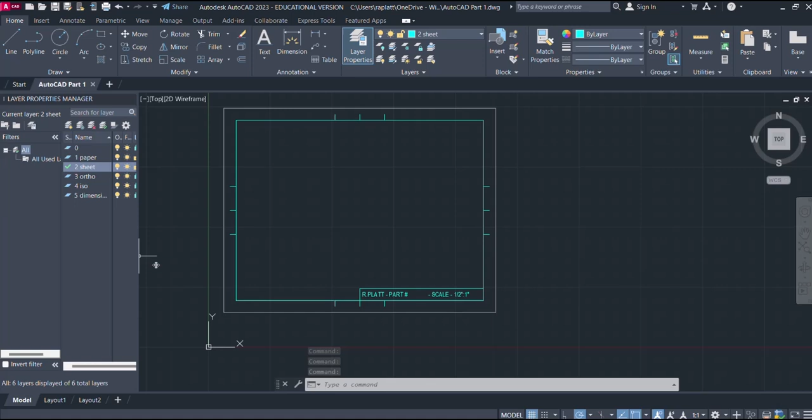There we go. Alright, now I'm going to go to my layer manager, layer properties actually, try to expand that out a little bit. Now because of my master, all my colors are preset, so that's good. So I'm going to click on orthos, lock everything. I need to make sure the ortho layer is unlocked.

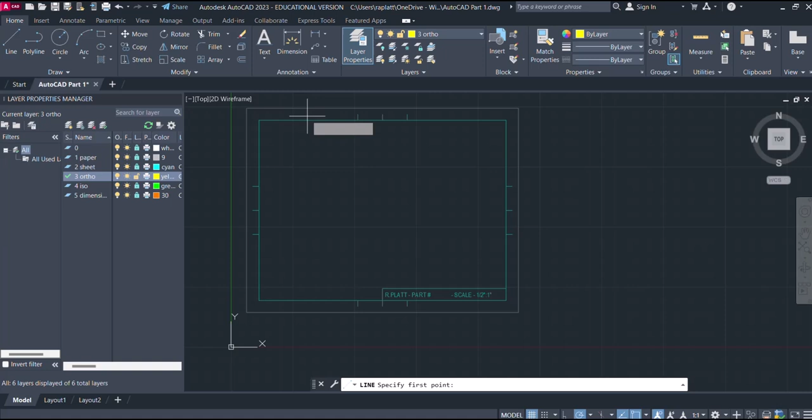That's good. So I get my line command. Now I'll come over here and snap to the registration marks I created. Hit escape. Back to line command. Now later you can hit your space bar between drawing segments and it repeats the last command you chose.

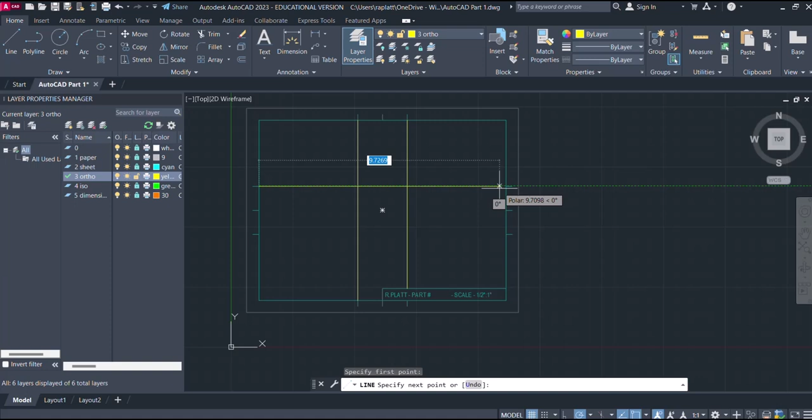Come across here, escape, line command again, put that right there, escape.

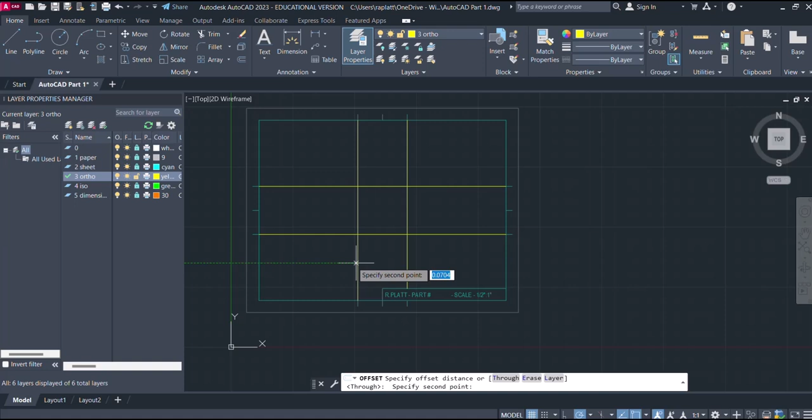Probably what we need to do now is go ahead and hit our offset. And I'm going to key in, wait a minute, hold on, I gotta snap to it first. Hit escape. There it is, 0.25. So select my object, grab that one, move it over, that's good.

Now come back and hit that offset command again. We're going to key in 0.75, so on the top view here we can grab that and pull it at 0.75. Now in the front view, excuse me, right view, we got to do that as well.

Okay, let's select it again, and I'm going to key in 1.25 for the height of the part. Grab that line, come down below it, looks pretty good.

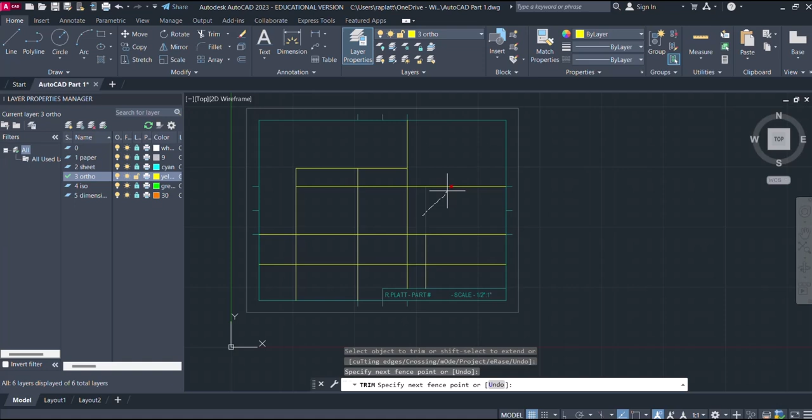Now let's trim out some of these lines so I can define what the top view is. I'm going to take that one out because I don't need it. Take these out right here. Okay, get rid of that one. Get rid of these. Okay.

Go back to my line command because I need to make sure I got that corner so later I can draw my ISO. So I'm creating my anchors here is what I'm trying to do. Hit escape. Let's go back to, no, not that.

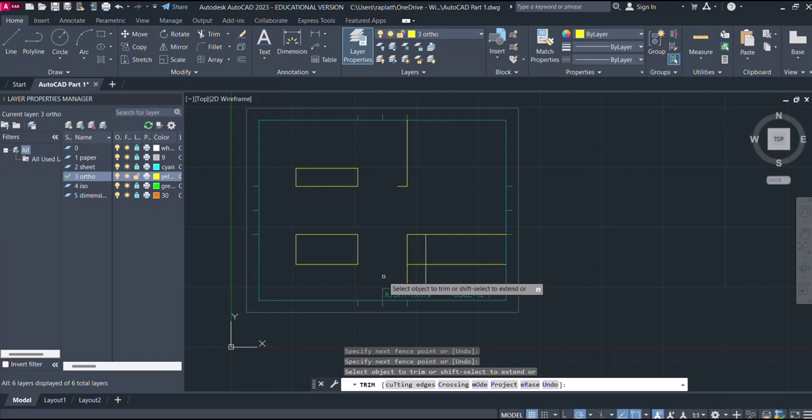There we go. Trim command again. Trim these out. See, now I can come across here and get rid of that. Still have a place where I can snap to create my ISO. Okay.

Alright, so let me think about this for a minute. I don't think that's what I want to do. Give me a second. Okay, let's go back to line.

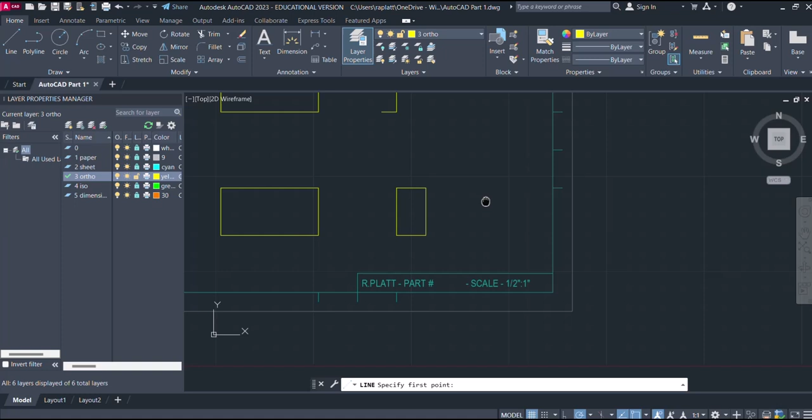And I need to start working on that front view, which is in the lower left. Hold on a second here, let me think. I've got that slanted area on that thing, so I'm going to probably hang on a second here. There we go. Get my trim command and take that out.

Go get my line command again. I'm going to come off of this 0.5. It's good. Okay, now it continues until I hit escape. So let me go ahead and hit escape. There we go. Go back to line command.

Select on this. Come up. Make sure I'm 90 degrees perpendicular. 0.25. It's good. Now I just snap to that. I got the front view done. Okay, it's good. Let's concentrate now on that top view by making an extension.

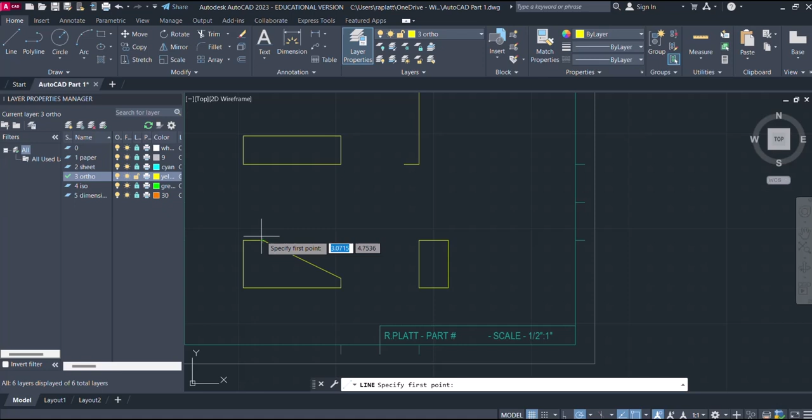I snap to that one point, then move my hand up. There we go. Got that feature in the top there. I'm going to come over here and do the same thing. Just go across, then I'll click. Come across there, and I got that feature drawn in. Alright, looks pretty good. Looks like we got our views in.

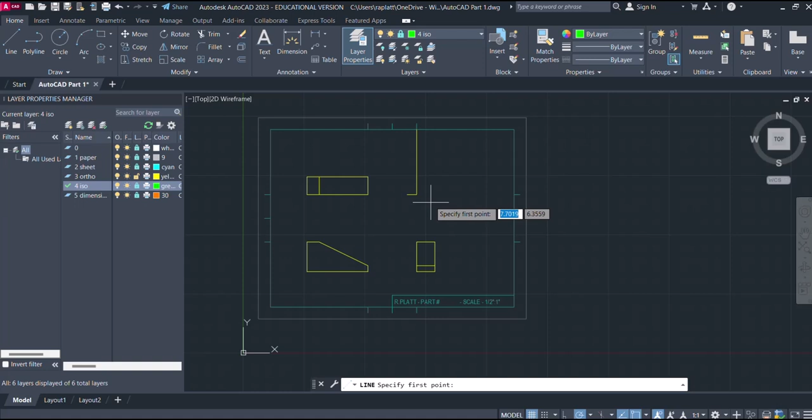So now let's go see if we can get to ISO. So click that. Okay, let me think here for a second. Get my line command. No, not offset. Roll up here on this. Kind of thinking through this here. Escape.

Let's go get that line. Make sure our projections are set 30, 60, 90, 120. That's good. Line command again. Come off, look for that projection line. I'll say 2.5. That's good.

Okay, I'm going to come up 0.25. Okay, and I kind of continue in that direction. It should say 0.75. Okay, looks good. Come down here, 0.25. That looks good. Come over here to that. Yes, I think probably hit escape. Okay.

And I'm going to come over here to line command again. This time I'm going to go up 1.25.

I'll come down 0.5 on that, go back on my projection line there of 0.75. Okay, now I just come down here and snap on that diagonal. Hit escape, go back to line command, and I'll come off this 0.75. Snap to that, get that feature in. Good, hit escape, line command again.

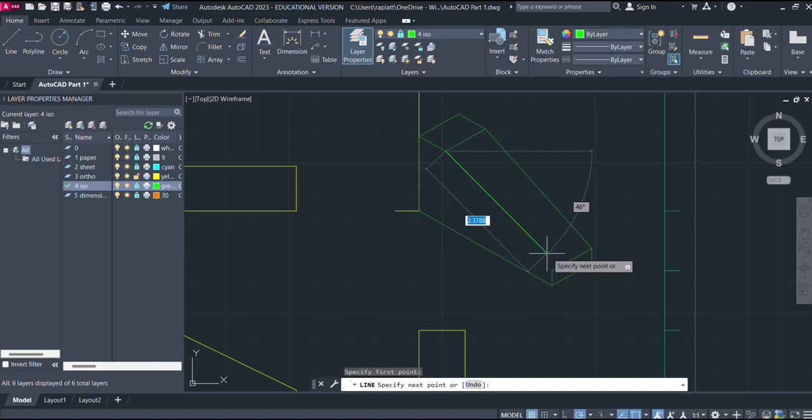That looks like it's finished. Okay, let's try to get back to the ortho view.

I think I need to turn this off. Well, first of all, I need to be in the ortho view. Yeah, it shows me still active. I can't do that, so I'm going to just say keep the layer on. And I'll come back to, let's see here, it's unlocked. Yeah, now I can see it's unlocked. Okay, I'm going to come back over and lock it again.

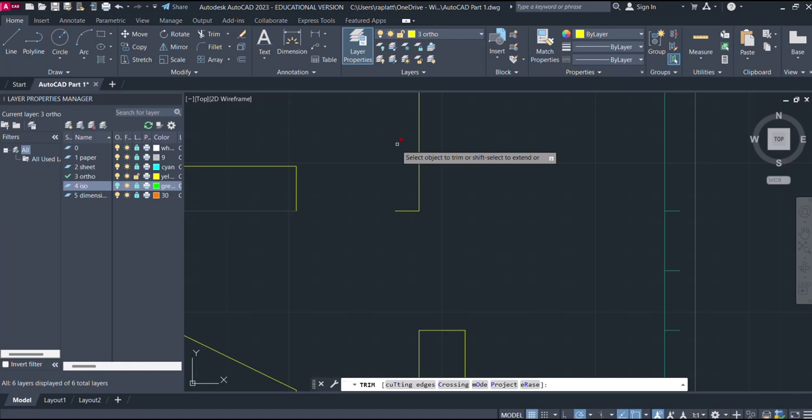Go back to this layer, now see if I can turn it off. Yeah, there it is. I'm turning it off because I need to trim out these lines from that one layer. Okay, yeah, looks good, turn it back on. I'll have to drag my mouse across to actually see it, even though I turned the light bulb on. There you go.

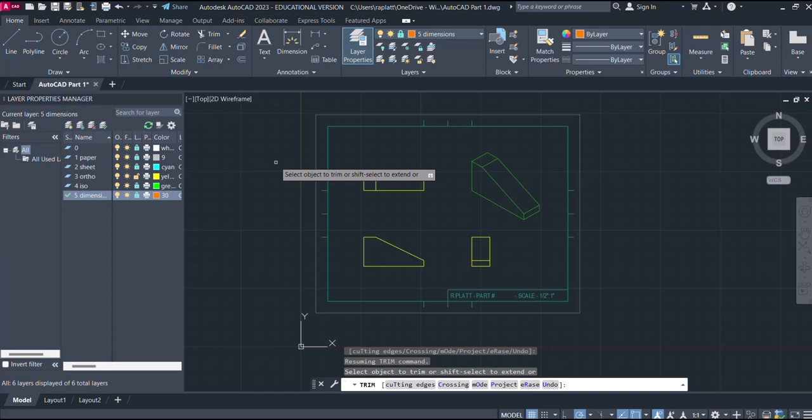Okay, all right, let's go ahead and look at dimensions. All right, kind of get this thing centered up. Grab my dimension command.

Come across and grab that corner, come down. About there's good, doesn't have to be perfect. Now let me make sure I got that dimension unlocked. There we go, I forgot to unlock it. So now it'll come up brighter orange.

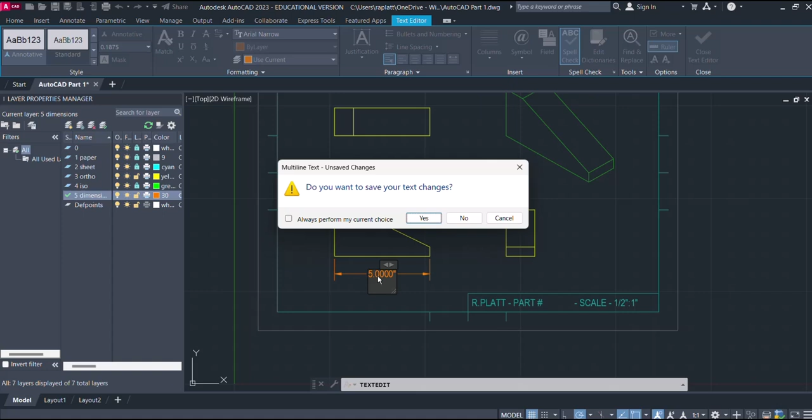So I'm double clicking on that, and I'm going to key in 5.000. One more zero, and our double quote, and hit delete so I can get rid of that other highlighted area. Whoops. Save my changes, yes.

Okay, now let's go ahead and dimension the side feature here. Actually, the top, the height of it. I'm sorry, come off there. Looks pretty good right there.

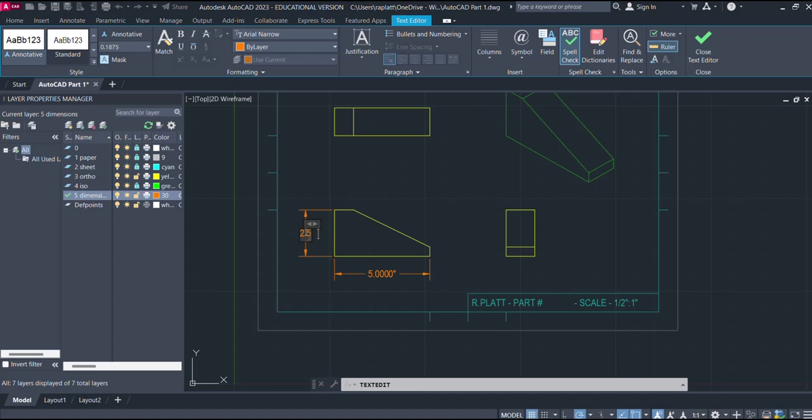Key in 2.5, whoops, got some spaces in here, let me get those out. There we go, double quote. Okay, click out here in space. Now I should still be in the command, so let's roll this down. I'll go ahead and click it again. Yeah, I've already got it.

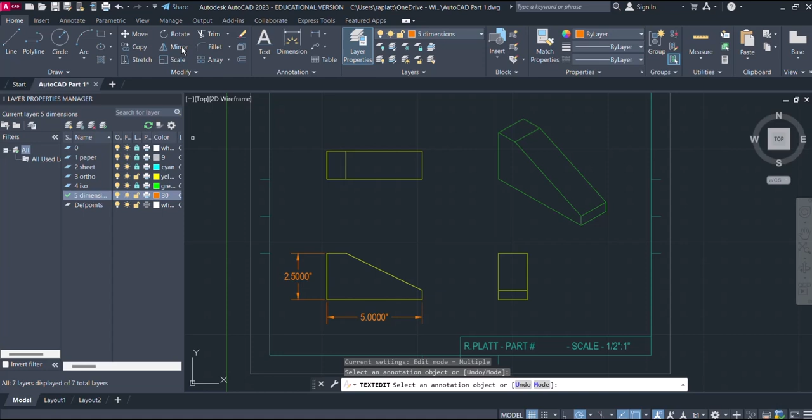Select an annotation object, or let's see here. Oh, there we go, I think I got out of the command. I need to come up here and do that again. There we go, see those little green corners light up, and you know you're in the command. Put that about right there.

I don't want my text touching the side of the border sheet. I can go ahead and change that, so I'm going to go ahead and say 1.5000, whoops, did space again. Double quote, okay, all right. Now hit that again, then you just, there we go. It should be 0.5.

Let me change that to 1 inch, 1.0, double quote. Looks pretty good. Whoops, didn't want to go down there. Okay, click out here. I can go back onto the piece and I can modify it. But right now, let's go ahead and get this dimension in here.

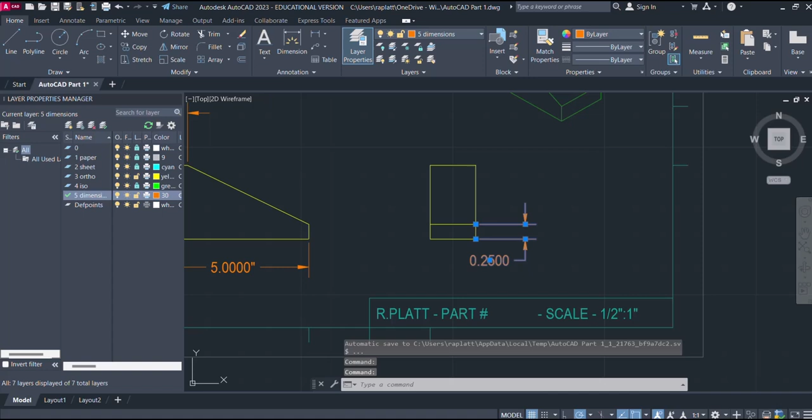It says 0.25, so what I'm going to do is double click on that. I'm going to change that to 0.500. Whoops, there we go, got that in there. I hit the delete key to get rid of that other dimension. Okay, let's see what we got here.

Roll up on this, everything looks pretty good. Looks good, let's kind of want to change that, I think it's kind of too tall. Here, let me zoom up on it a little bit better. Keep hitting that, probably need to hit another thing other than that. Oh, there we go. Well, there we go, okay.

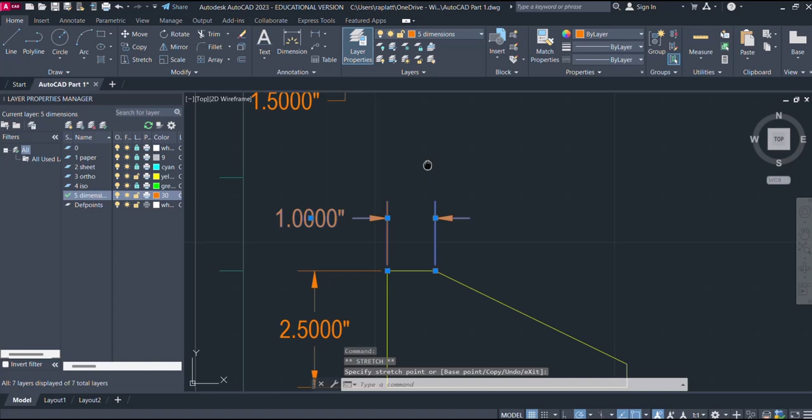Now just grab one of these points, just pull it down. It looks a little better. Okay.

All right, now we need to go back to our sheet layer and make it active. Okay, I need to modify that text. What do I need to do here? Something's not highlighting, that's not working.

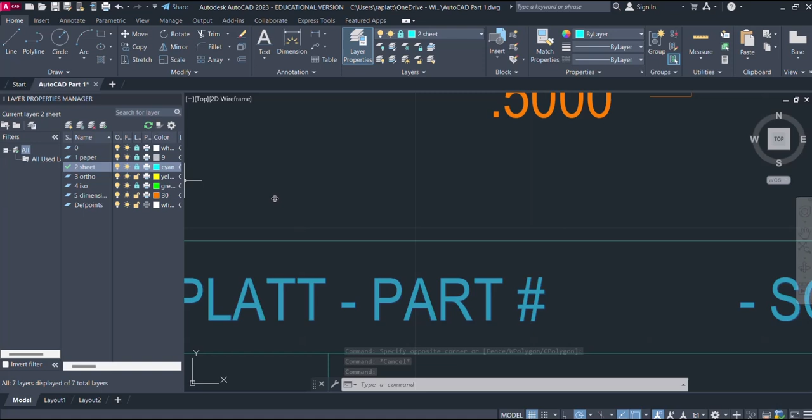Let's check the layer here real quick. Oh yeah, let's see here, layer's locked. Let's unlock it, yeah, it'd probably be easier to edit now. Double click. You double click it until you get it highlighted like that.

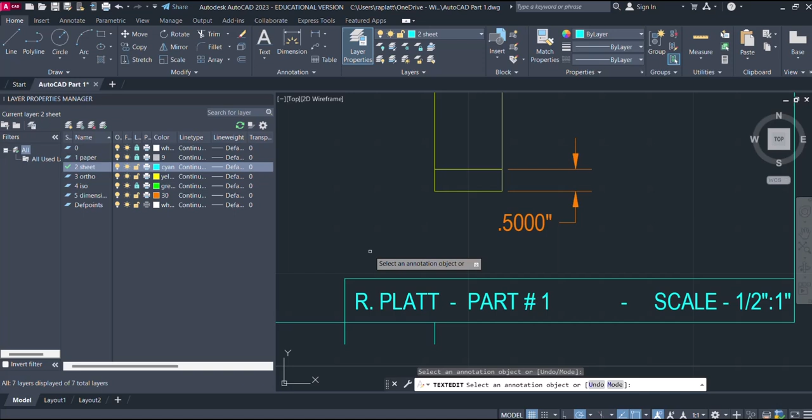That's good, so I'll space over here, arrow over, and I'll say 1. Okay, maybe put another space in there. I don't know, let's edit it again. Just double click on the text and you can edit it. Yeah, space that over. Probably what I'm going to do now is come over here, put a space there, and between my initials I'll go ahead and put a 1 in. Looks pretty good, alright.

Let's go ahead and save our file.

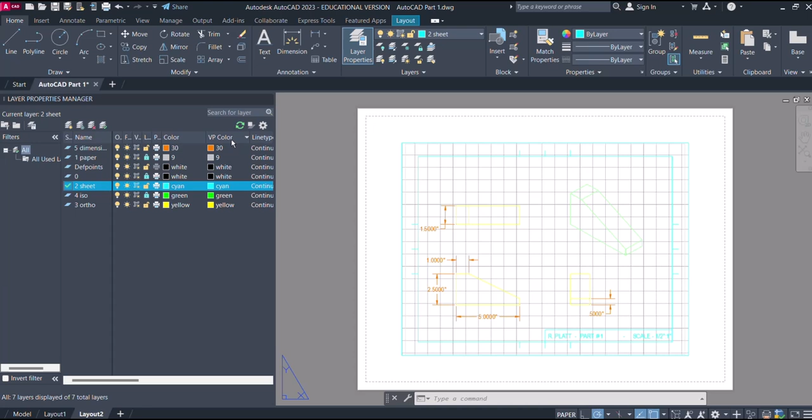Make sure we don't lose any of the work we've done. Now I'm going to come down to Layout 2. I always use Layout 2, but you can use Layout 1 - they both work the same. Now it pops up in a paper view, as you see underneath the drawing, so I need to change these viewport colors.

So I'll go ahead and start changing them. Let's see what's going on here. It's not working. What am I doing wrong? Keep trying to change this. Still saying it's not going to work.

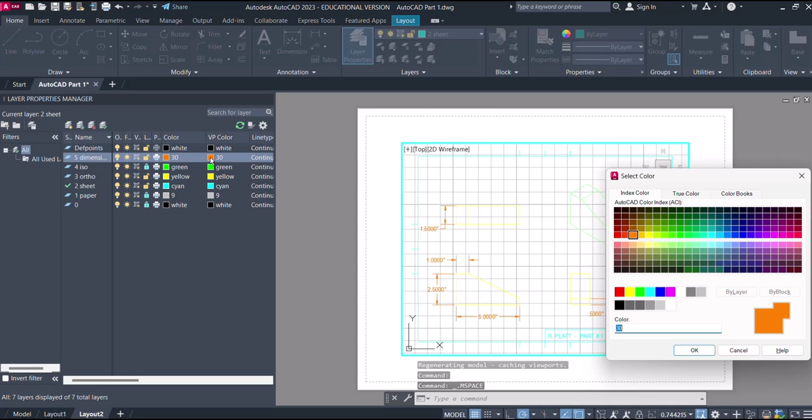Okay, let me come down here and change that to model view. Double click on that, color, turn it to black. Okay, I turned it. Now let's go to the ISO layer, turn that to black, see if that worked. Yeah, it did. Okay, go to the ortho view, turn that to black. There we go.

Let's turn our border sheet to black. Looks good. Okay, and the paper, I'm going to turn it black now, but later I think I'm going to go back and turn it to just white, so when I print it you won't see that white layer. But for now we'll just go with this. Save our file.

Okay, I'm going to adjust these parameters out. Looks good.

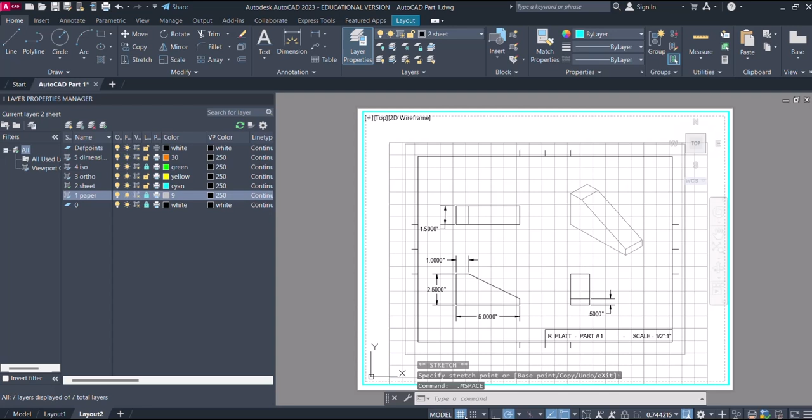Now, a lot of times you have to come back and adjust those a couple times before you get it right. I'm going to go back to model view, turn the grid off, set my scale to 1 to 1. Okay, that's exactly accurate, so if you put a ruler over that, it'll measure out correctly.

So let's go back to paper view. Let's go over here and come down here to layout again. Right mouse click. And, well, there we go.

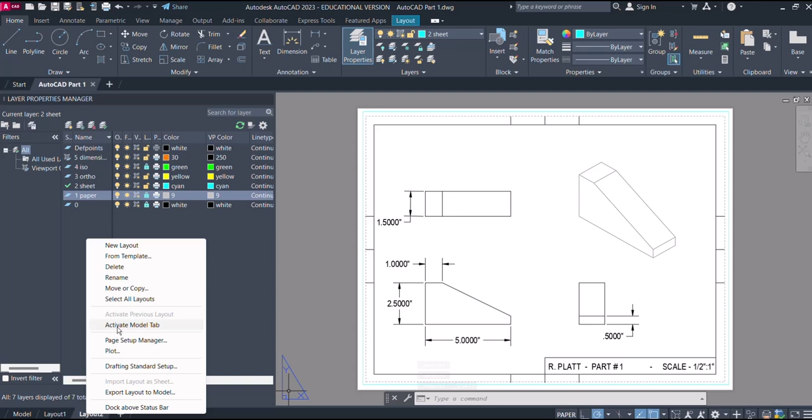Hit plot. I'm going to come up here and make sure I set to Microsoft print to PDF. That's perfect, acad.ctb, it's good, it's a pen table. Hit apply to that.

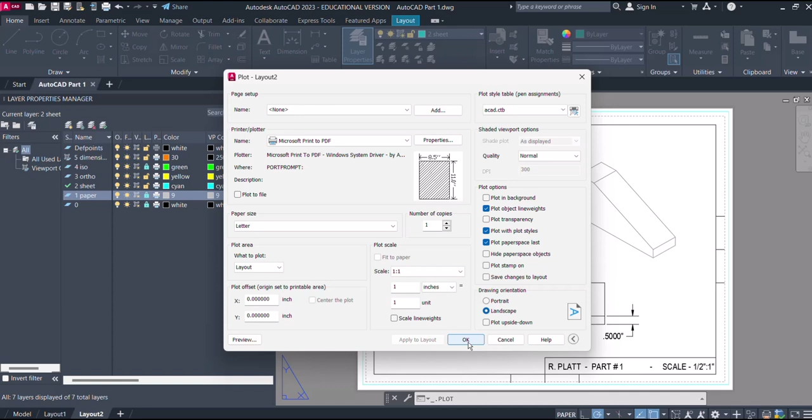Now, subsequent drawings, you can go out and keep doing that. Let's go ahead and hit that OK. And it's going to change kind of the view, but first of all we've got to give it a name, so we'll scroll down here and give it a name.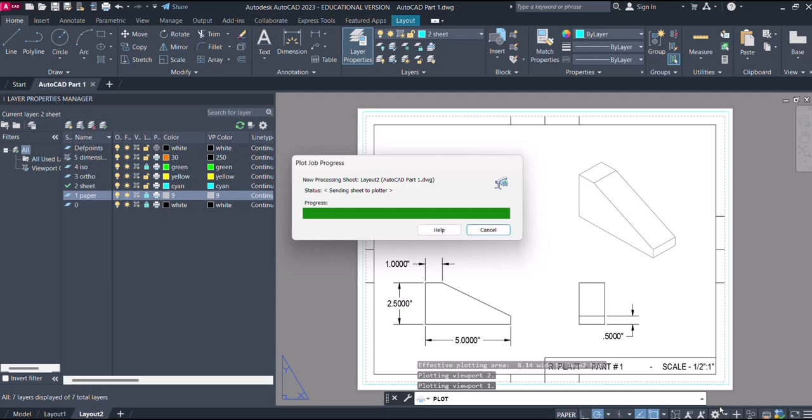Okay, think about this for a second. Okay, AutoCAD part 1. Let's see, 1. Okay, it looks good, go ahead and hit save. It's going to write that file out to a PDF now.

Okay, now notice I've kind of shifted to the left, lower left. Let's see if we can fix that. Okay, we're already in plot, already in layout 2. So hang on a second, let me think about this. Looks like my viewport might be a little off since it tried to do that.

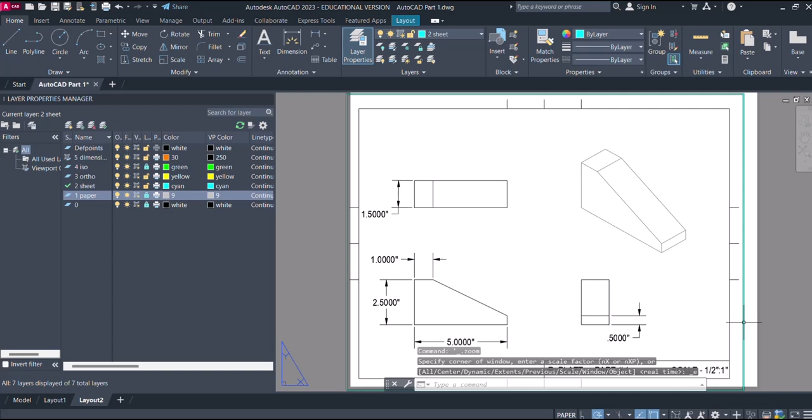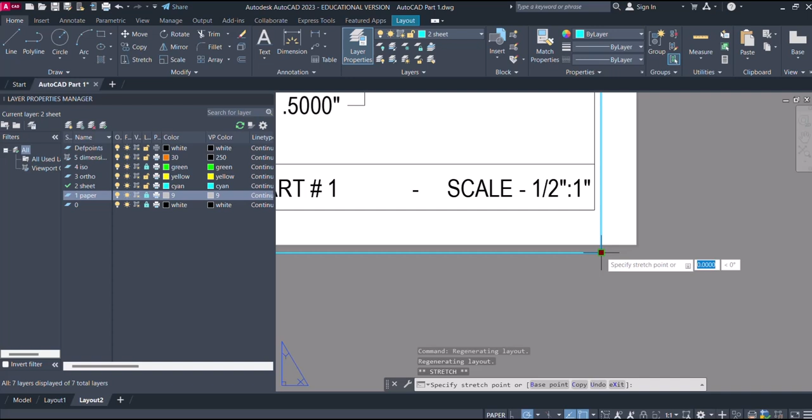I'll click on that and scroll out so I can grab that corner point, scoot it over. Looks pretty good - oops, hang on, do that again. Yeah, kind of centering it up on the sheet a little bit better, the page. Grab that viewport again, go back to paper, click on that, scroll, grab that control point there and move it to your right.

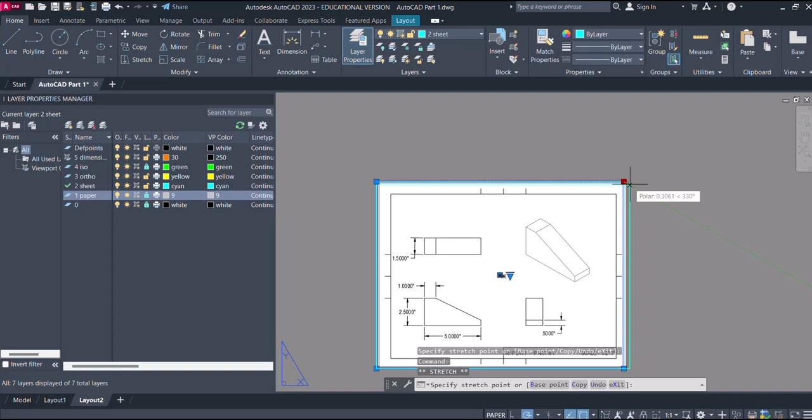Let's take a look at that now. Move that up a little bit. I can grab it - there we go. Okay, looks a little better. I'm going to grab this one again. Maybe that one, move it over.

Okay, and go to plot again. Now since I plotted it once before, I'll just go ahead and say previous plot. Okay, hit OK.

And let's go down and save this to - I've already saved it once. I'll click on that and write over the one I've already done. Yeah, I said OK, I'm just going to save it again.

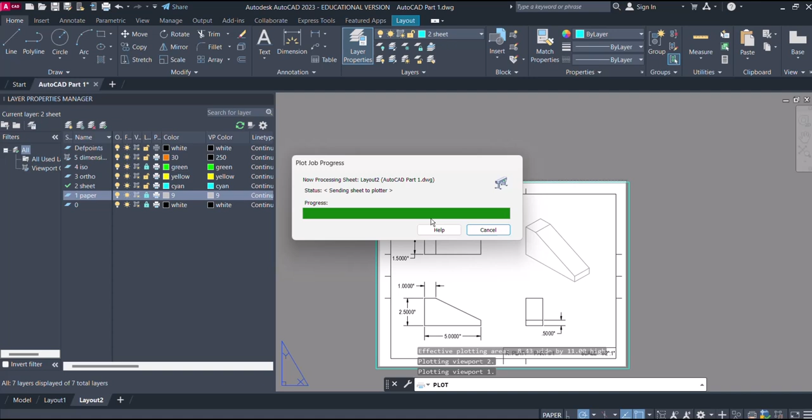Now what I want to do is go find my folders where I saved those files, and it should be on my documents folder, home, wherever documents is. Yeah, it's there. I can right mouse click on it there. Let's see what it looks like. Hit right mouse click and I'll open it in Chrome.

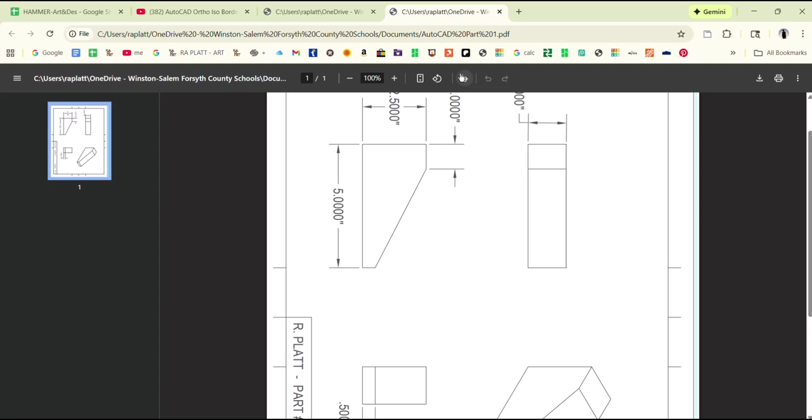And it looks pretty good, let's go ahead and scale this out. Now you can rotate it if you want to get a view, but that's a good looking drawing - I think I like it. So we've made our first drawing in AutoCAD. We've plotted it to a PDF file, and I think that looks pretty good. Now let's go on to part number 2.